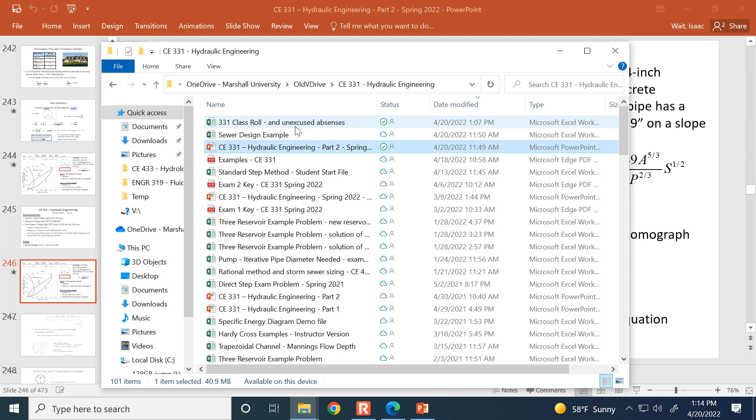So in the sewer design procedure - oh, I'm sorry, hold on a second here. No, I've gotten confused. The template is for a different example. We won't use it for this one, although we could.

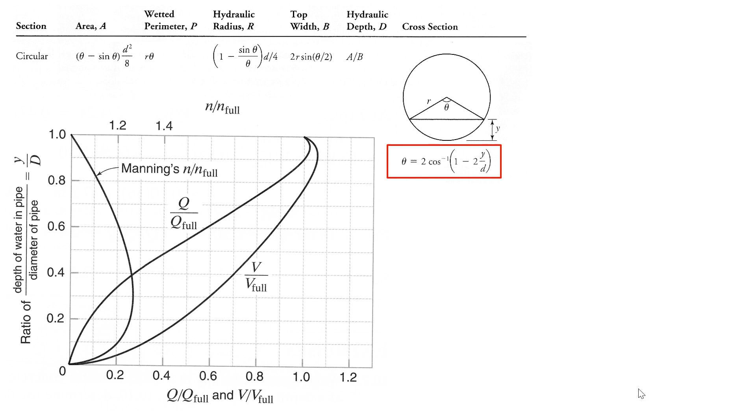I mean, effectively what we're doing is using the geometric parameters, starting with a guess value of theta and setting the right-hand side and the left-hand side equal. We've got a different example we're going to use the template for, but maybe if we've got the time, we'll come back and validate what we had solved on paper with this example.

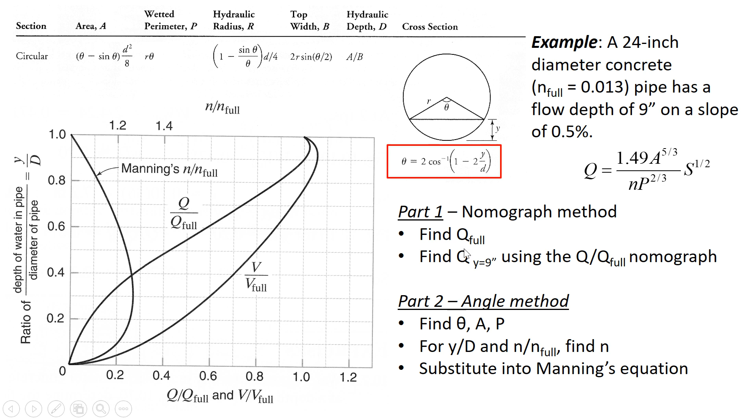All right, so let me show you how we do use Excel and why that template is set up the way that it is. The first thing that we do is determine whether we're using SI units or British gravitational units. If we're using standard English imperial units, then 1.49 is the coefficient that goes on the Manning's equation. And if it's SI units, then we just use 1.

And so we rearrange Manning's equation for a circular pipe. In terms of the diameter of a circular pipe, we can express both the area and wetted perimeter in terms of D for a pipe that's flowing full. So size the pipe diameter for max flow.

What we want to do is solve for what diameter is needed so that the water's all the way at the top of the pipe when the conditions are maximum flow. And by the way, do you remember - this is a bit of a review - what is the hydraulic radius when you have a circular pipe that's flowing full? D over 4. That's right, D divided by 4.

So the hydraulic radius, remember, is area divided by wetted perimeter. And the area is pi d squared divided by 4. And the wetted perimeter is pi d. So if we cancel out the pi, cancel out the d in the denominator and one of them in the numerator, then that's just d divided by 4. So that's what's going on in the background here where we're doing this substituting and rearranging for d.

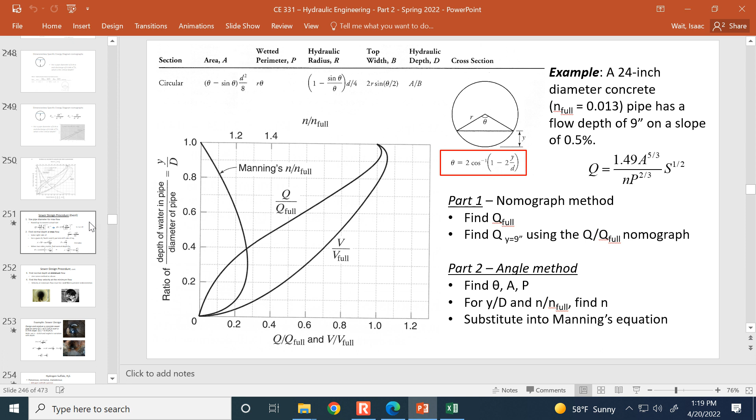Okay, so back to this procedure. We solve for theta when the left-hand side and the right-hand side of this equation are equal. And then once we know what the angle is, from that we can determine the flow depth y. So theta can be determined based on the ratio of depth to diameter, or if you know theta, you'll find the flow depth by knowing a certain pipe diameter.

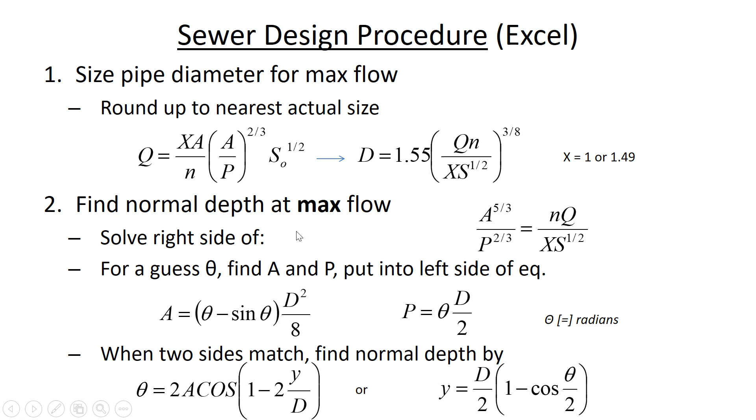So this is going to be built into that template, but we also want to consider what's happening in the sewer under conditions other than maximum flow. We also want to evaluate what is the depth when you've got the minimum flow going through the pipe, and you want to also determine what's the velocity when there's the minimum flow.

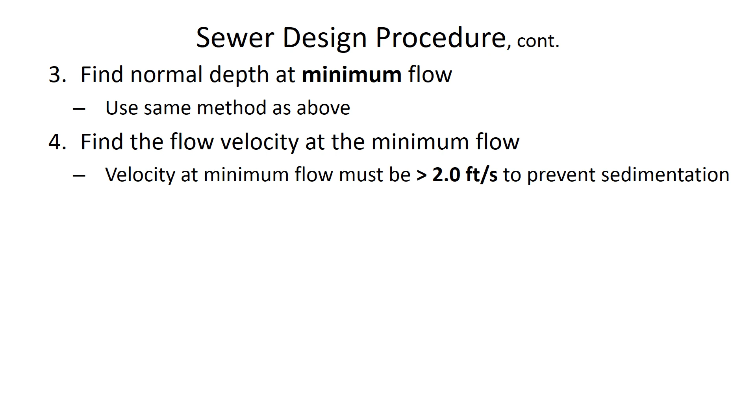And optimally, you'd like to see that the velocity in the sewer stays above 2 feet per second, because if it does, then the sewer will have a self-cleansing effect. And if it falls below 2 feet per second, then the sediment and solids that are in the sewer can settle to the bottom of the pipe. They can stick to the bottom, and the pipe can begin to fill with materials.

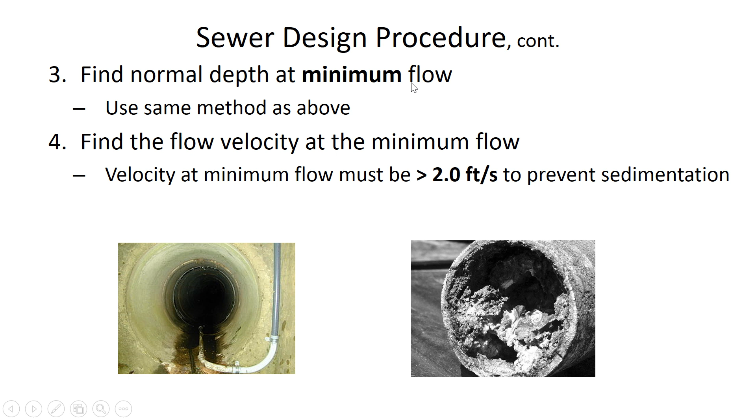Okay, so let's say that we have a concrete sewer pipe that needs to carry a maximum flow rate of 2.5 cubic feet per second. And we expect that it's going to be laid out on a 0.75% slope. And then during the minimum flow periods, the flow rate's going to be as low as 0.45.

So just to simplify things, what we're going to do is stick with an n value of 0.013. We could make our answer about the flow depths a little more accurate by accounting for the varying n value, but just as a first exposure to this design process, let's neglect the slight variations in n value that can occur for partial flow depths.

So again, we're going to step through this process of finding out what diameter is required, rounding up to the nearest available commercial pipe size, finding out what is theta, from that determine the depth, and then evaluate how the pipe behaves at the lower flow rate.

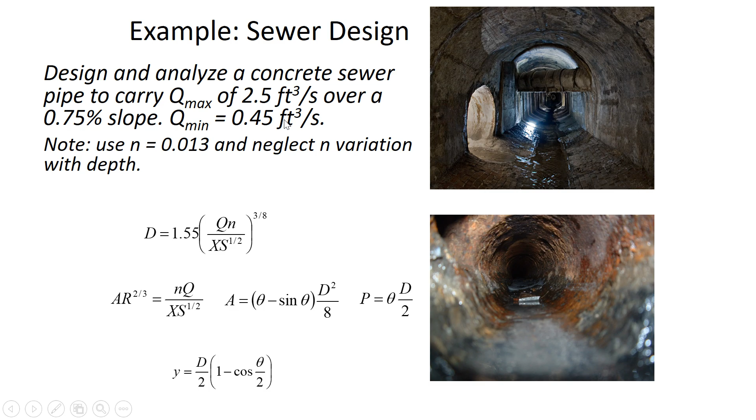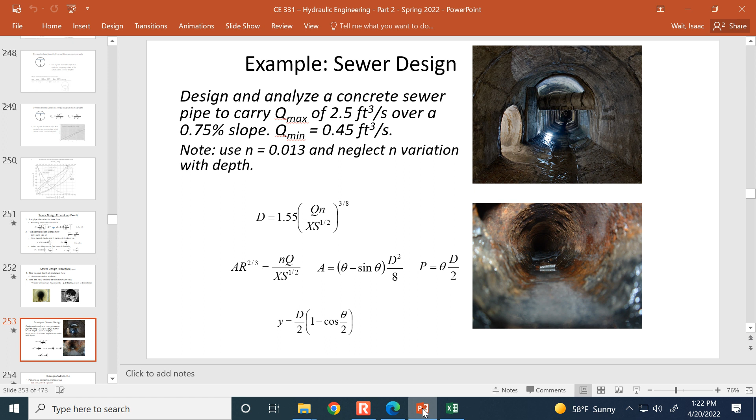Okay, so now this is the point that we will take a look at this spreadsheet. So in our problem that we're working on, we've got traditional units, cubic feet per second. And so what that means is we're going to use x as 1.49. That's the coefficient that we put in front of Manning's equation if we have traditional units.

The maximum flow rate we have to accommodate through the pipe is 2.5 cubic feet per second. And then the minimum flow rate is 0.45 cubic feet per second. And then the slope, 0.75% means 0.0075, or in other words, we have 0.75 divided by 100, which is 0.0075. And then the n value here, 0.013.

Now, if we wanted enhanced accuracy, what we could do is, after we go through and iterate this a couple of times, we could also refer to this figure to update the n value. For now, we'll leave it as fixed.

Okay, so what is the pipe diameter that's needed according to Manning's equation, assuming that you've got the water filling the pipe all the way to the top? So we're going to solve this, Manning's equation, which has been rearranged for D.

Okay, so it equals 1.55 times the flow rate maximum, and I'll anchor that reference, although I don't know that I necessarily need to—I guess it doesn't cause any harm. Multiply it by the n value, divide by this coefficient 1.49, and in the denominator we're also multiplying it by the slope to the power of 0.5. And then everything that's inside of those parentheses is raised to the 3/8 power.

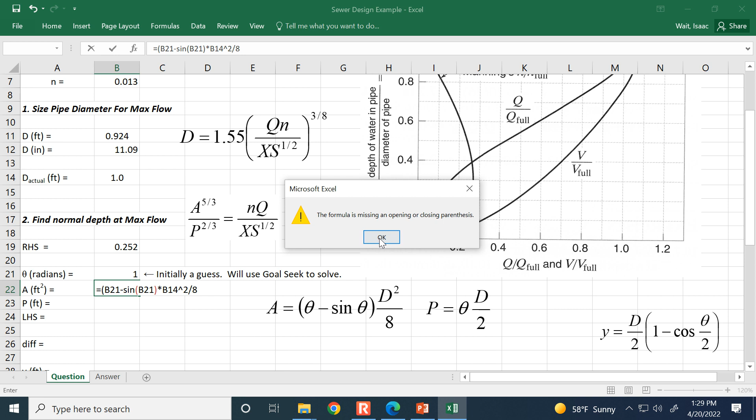Okay, once again, looks like I need to be more careful about my parentheses. There we go. No, the parentheses should be here. Really off my game today. Okay, so let's see, squared divided by 8. Yeah, okay, so this time I don't want parentheses around this because it's not to the 2/8 power — it's squared and then divided by 8. All right, let's see if that's more like it.

Okay, so I've got some area based on the angle. Let me write the wetted perimeter in terms of the angle. So that is going to be the angle times the diameter divided by 2.

And so then the left-hand side of this equation is area to the 5/3 divided by wetted perimeter to the 2/3. So area to the power of 5 divided by 3, in parentheses, divided by wetted perimeter to the power of 2/3.

So that's the left-hand side of the equation, and it's not going to match the right-hand side of the equation, not yet, not just when all we've got so far is a guess value of the angle.

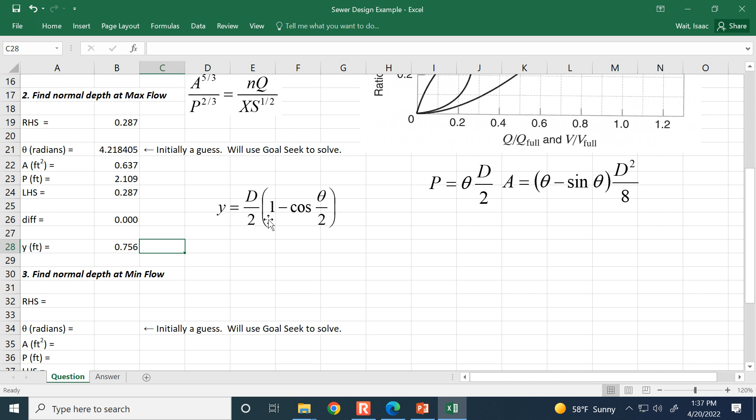This is the flow depth at Q max where we have iteratively corrected the n value for partial depth. So this really is a good estimate of what the flow depth is going to be.

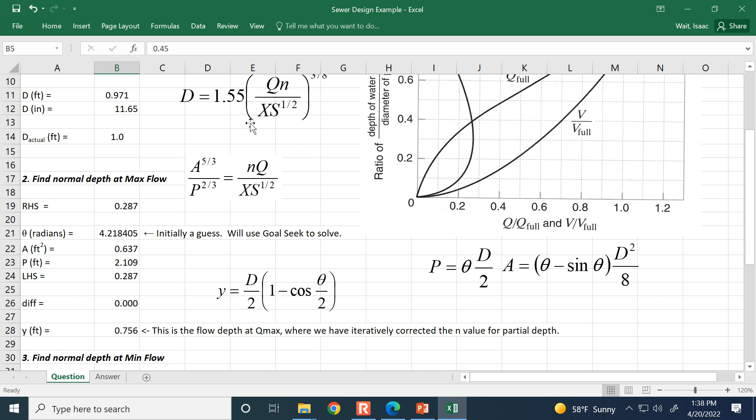Okay, so then what's happening at minimum flow? We've got that 1 foot diameter pipe, and minimum flow is when the conditions are 0.45 cubic feet per second. So again, we have to evaluate what's the right-hand side of this equation when we've got the minimum flow.

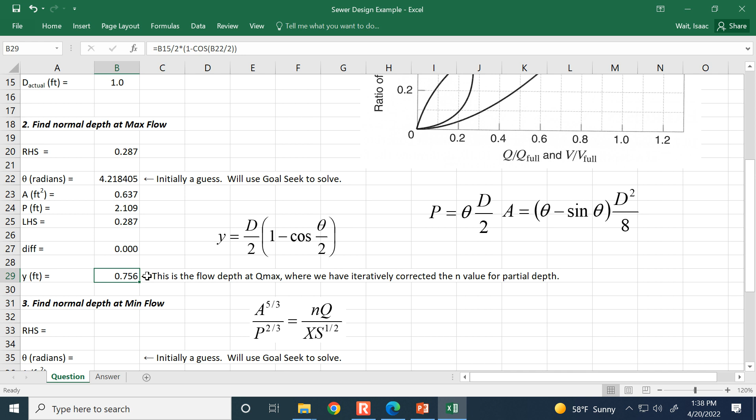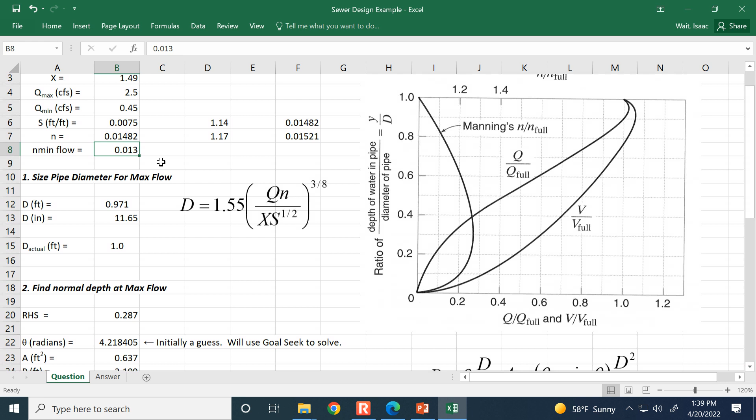So the right-hand side is going to be the n value. The n value that we're going to use is, we'll start with this one. There's going to be a different n value because it's going to be lower. I'm going to call this n min flow because I don't want to change this because then it would change the flow depth at the max flow. So the n value at the minimum flow, let's start with a guess of 0.013, and we'll have to do that correction thing. So this would be the n value if it was all the way full, and we know that it won't be.

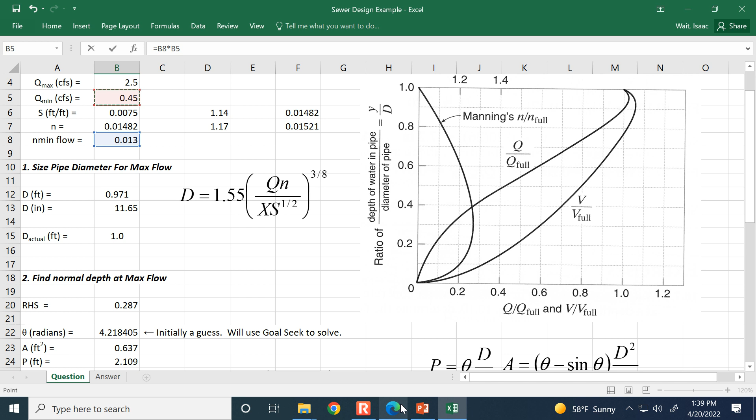So then the right-hand side is going to be n times q under the minimum flow conditions divided by x times s to the 1/2 power. Okay, so that's the right-hand side of the equation.

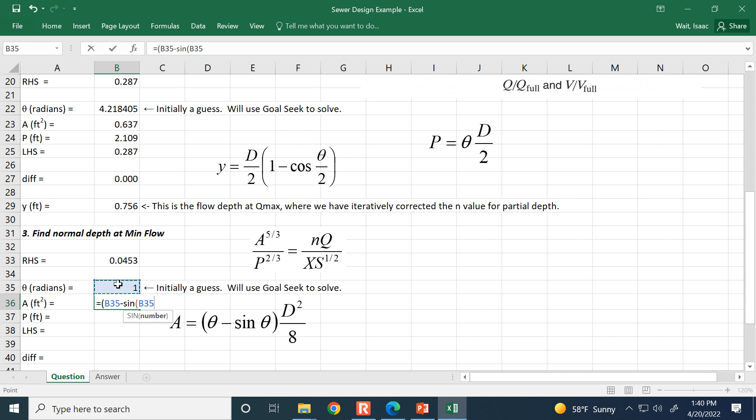Theta, again, I'll just start with a guess of 1 radian. And then the area and wetted perimeter as a function of that guess. Here I'm going to say that the area is theta minus the sine of theta times the diameter, which is still 1 foot, diameter squared, and then all of that is divided by 8. Okay, so I've got a cross-sectional area.

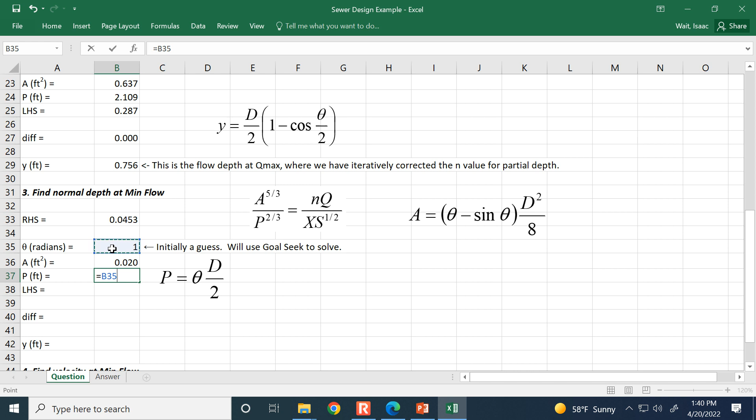Now I want to determine the wetted perimeter. So it's going to be the angle times the diameter, 1 foot, divided by 2.

Okay, so the left-hand side of the equation will be area to the 5/3 divided by wetted perimeter to the 2/3. Here's the area to the power of 5/3. And then divide that by the wetted perimeter to the power of 2/3. Left-hand side is pretty small at this point. I think you put 5/2 instead of 5/3. Oh, good catch. Thank you.

5/3. All right. So the difference between the right-hand side and the left-hand side, and we want to goal seek so that the difference is 0, and then that'll tell us what is the angle at that minimum flow rate. So data, what if analysis, goal seek. So we want our difference to be 0 by changing the angle. Okay, and it says that the angle will be 2.11 radians at the low flow rate.

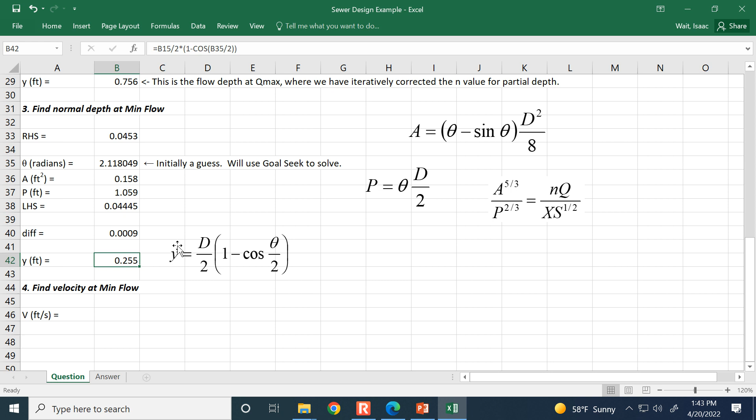Does anybody know what it is? Manning's N. Yeah, so all of this was assuming that the N value was 0.013, but it's going to be higher than that because the pipe is only about 25% full, according to our best guess so far. So when the pipe is 25% full, then we go over from, let's see, it'll be the middle here. We go over, and that's where the biggest difference occurs between Manning's when it's partly full and when it's completely full. So if I go up with that, I think that's about 1.27.

So 1.27, the full value. So what we're going to have to do is 0.013 times this correction factor. So instead of using 0.013, I should use 0.01651 for the n value because it's not flowing full. So I have to correct that, 0.01651. So that's going to be the n value when it's only partly full.

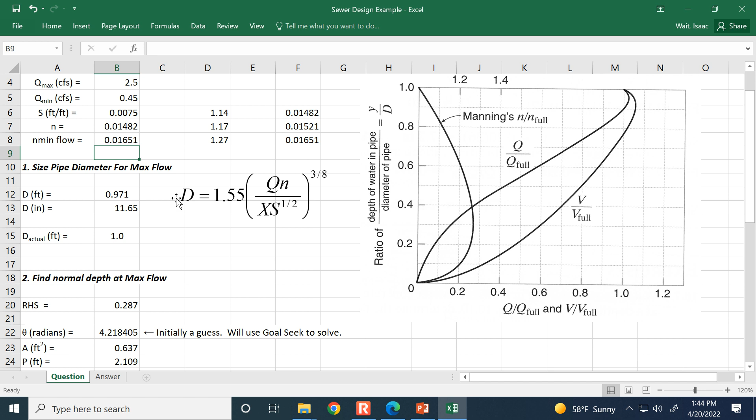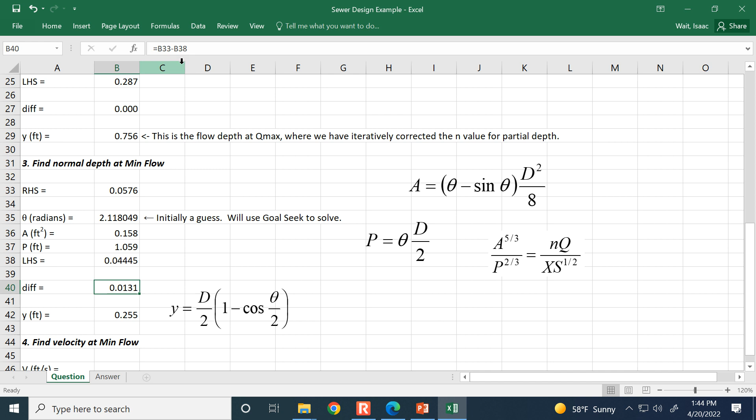And that changes our estimate of the angle. You'll see that the difference has deviated from 0 because of that adjustment to the n value that was just made. So again, I have to run through goal seek. And I won't do this 3 times like I did before. Let me just go through this 1 time. So we want the difference to be 0 by changing the angle.

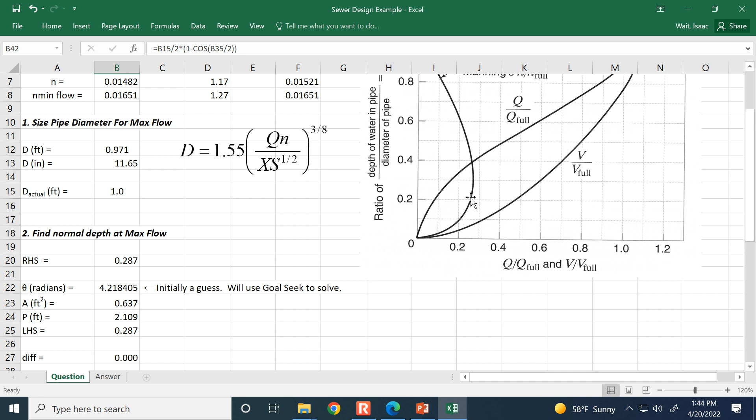All right. Fortunately, it's a more modest change. It's just saying it's going to be, instead of 25% full, it's going to be 29.4% full. And that still puts us about in the same range on this curve. It was a flat section where vertically you don't get much change in n value from an adjustment in depth.

So we don't have to iterate through another time, but here is going to be this is the flow depth at Q min, where we have iteratively corrected the n value for partial depth.

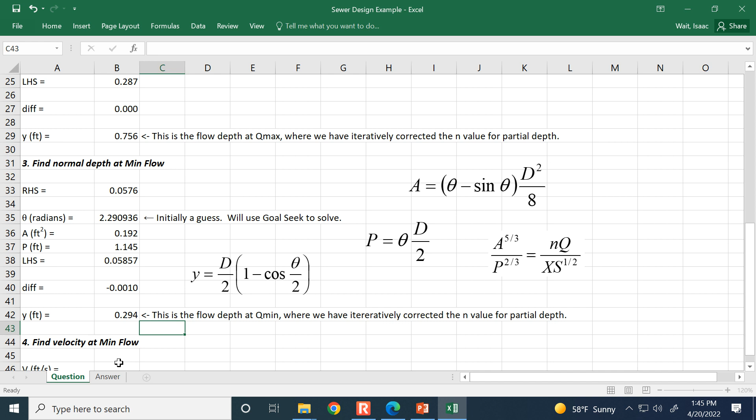All right, the last part of this is just evaluating what is the flow velocity at the minimum flow depth. And the way that we can find the velocity is Q divided by A. So we know the flow rate going through the pipe at minimum.

It is 0.45 CFS. So it's Q divided by the area under minimum flow conditions, which we've just calculated. We had cubic feet per second for our flow rate, and here our area is in square feet, so that's going to give us the velocity in feet per second. So it's going 2.34 feet per second.

And our guidelines say that the minimum flow velocity should be above 2 feet per second, so I think we're going to be okay. It'll keep the solid suspended. It'll help limit the amount of maintenance that's required in this sewer.

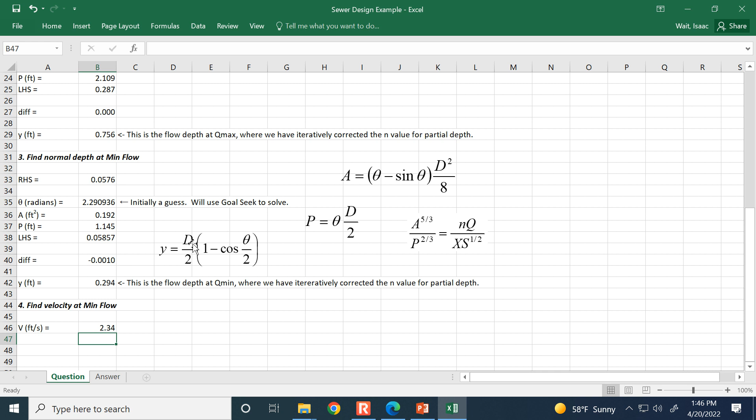But the greatest factor that dictates that flow velocity is the slope, and unfortunately that's a parameter that the designer doesn't ultimately have a lot of control over. The slope is, in some parts, dictated by the elevation of the ground, because although the pipe is underground, if you have it at a different slope than the ground slope, then the pipe will either be getting deeper or closer to the surface. And so sometimes if it's completely flat ground, like Kansas type flat, they'll still have a slope to the sewer pipe, but then they'll have those pressurized lift stations that I was talking about on Monday.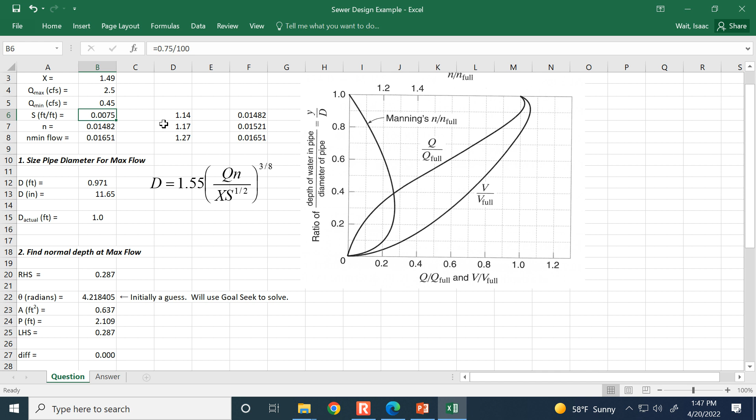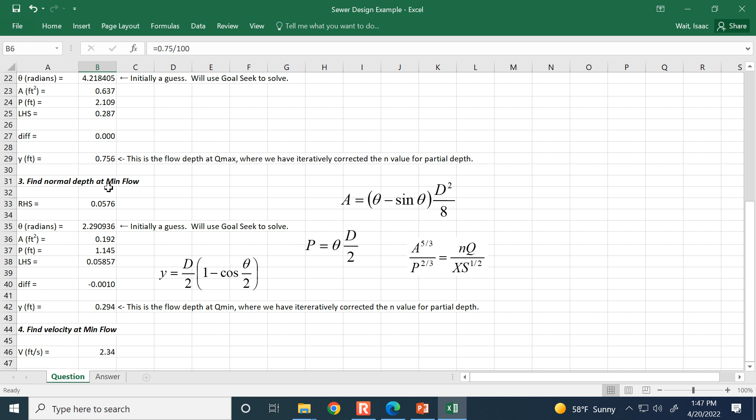But in this case, the 0.75% slope is adequate for us to stay above the required minimum velocity. So that is the sewer design procedure. Now, in the 3 minutes that remain, I want to tell you about hydrogen sulfide.

It's a poisonous gas that can form when wastewater is degrading under anaerobic conditions. That means if there is not enough oxygen in the water, then the waste begins to decompose by bacteria that consume the energy in the waste, but they do that without oxygen as an electron acceptor.

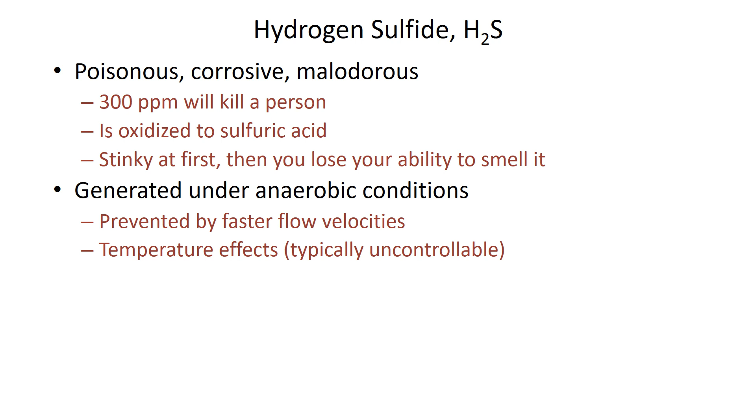So if sewers move slowly, then another problem besides sedimentation is that that's more prone to anaerobic conditions that cause this poisonous gas, hydrogen sulfide. It's also corrosive, and it can cause premature degradation of concrete and the reinforcing steel manhole covers.

So there are empirical equations that estimate the potential for the formation of hydrogen sulfide, and those equations take into account both the hydraulics - the flow rate, the wetted perimeter, the width of the water surface at the top of the pipe, the slope - but also something known as the effective BOD.

And I think probably everybody in here has taken environmental, or is either taking it or is in it this semester, right? Do you already know what BOD is? Biochemical oxygen demand? Well, this effective BOD is just adjusting for the temperature of the wastewater.

So you'd take the BOD at 20 degrees and then you'd empirically adjust it depending on what the temperature of the wastewater is. And typically wastewater would be about the same temperature as the home that it's coming from, so it may be that the wastewater is warmer than 20.

So when you calculate this hydrogen sulfide potential, you can find if the Z value is less than 5,000 that it would be uncommon for hydrogen sulfide to form. There's an intermediate range where it's possible, and in any case, people who are going down into maintained sewers need to work in pairs, have someone who can rescue the worker that's working down there. They have hydrogen sulfide detectors.

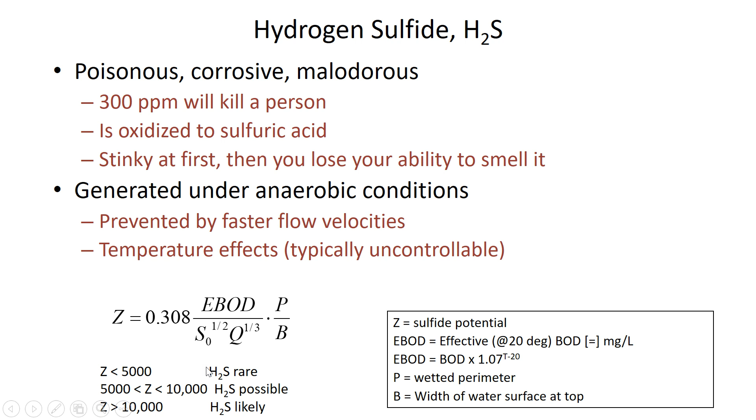But if the Z value is above 10,000, then it's likely, and that would mean that you need to be especially careful. And from a design standpoint, you try and change it so that you increase the slope and reduce the Z value. Because if you do this at the design phase and you're predicting that there's likely to be hydrogen sulfide formation, then the sewer system isn't going to last as long as it should. So it's something that you can maybe take into account during sewer design.